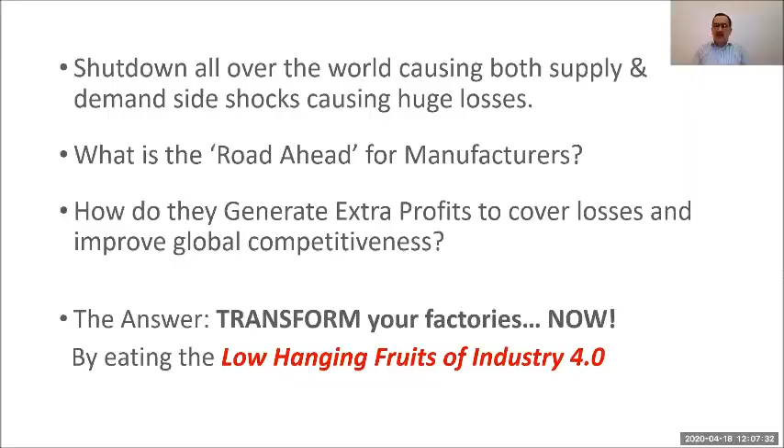So, before we move forward, I'd like to briefly recap what I told yesterday about the 3 low-hanging fruits.

First of all, Industry 4.0 is nothing but the fourth industrial revolution. The first took place 250 years ago in Britain with the invention of steam. The second took place around the beginning of the 20th century with the large-scale use of electric power and assembly lines. The third industrial revolution took place around 1970 when electronics merged with mechanical engineering, and you had PLC controlled machines, then NC, and finally CNC. So whatever we are seeing today in most factories of the world, 99% of the factories, is some variant of Industry 3, which means more and more sophisticated versions of Industry 3.

Now, the difference between Industry 3 and Industry 4 is that in Industry 4 you have everything connected. So all your machines - let me give a simple example. You can have a factory with 100 CNC machines, latest Mori Seiki or Mazak or some 5-axis machining centers, and that factory is still working under Industry 3 standards. Whereas you could have a factory where you have one hacksaw machine or a metal cutting machine which has a black box fitted in it, transmitting its data in real time. That is Industry 4. So Industry 3 or 4 has nothing to do with the type of machines. It is to do with the fact whether all your machines are connected, they are transmitting data, they are receiving instructions, they are being monitored in real time.

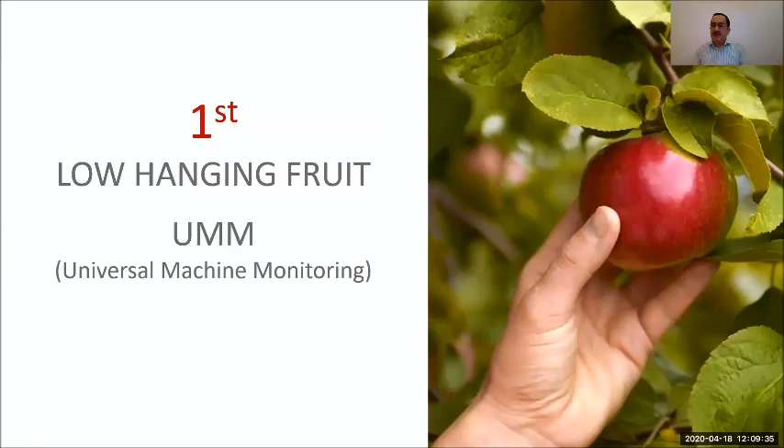That is Industry 4. So the first low-hanging fruit of Industry 4 is this universal monitoring system, wherein any machine of any make can be connected with a black box which will lift the data about its running, about its downtime, about how it operated in a shift, in a day, every hour. And through cloud, it will convey the reports as well as alerts to concerned people. So this is the first low hanging fruit.

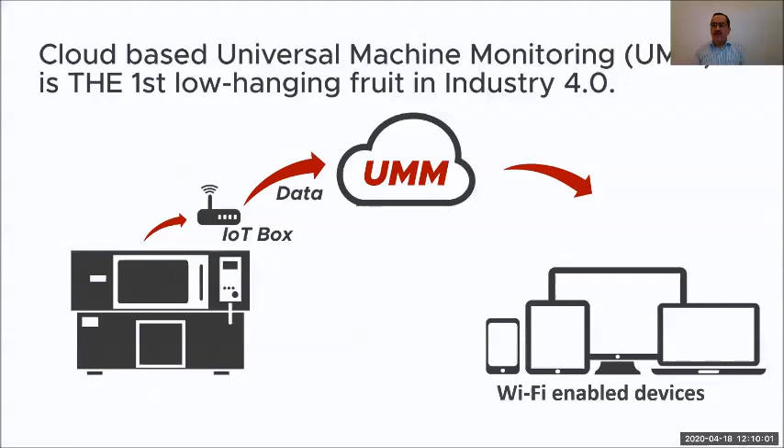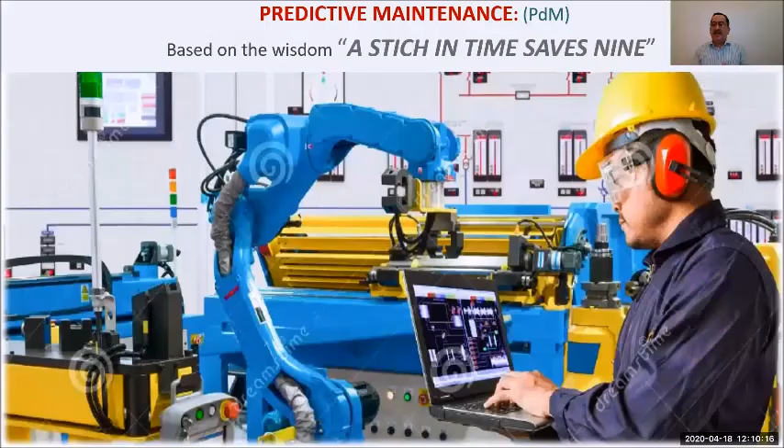Second is called predictive maintenance, where instead of waiting for a machine to go bad, instead of waiting for breakdown of a machine, or simply relying on preventive maintenance, we use technology which is basically sensors to detect the symptoms of potential diseases, future problems. So you detect those symptoms, whether it is increased vibration in the bearing, or excessive heating of the motor, or things like that, to sort of pinpoint that, okay, this means that the assembly is misaligned, or bearing preload is not correct, or something else.

And this is all done by the system. The system has the intelligence to be able to read the symptoms and give instructions to concerned people to go and take the necessary action.

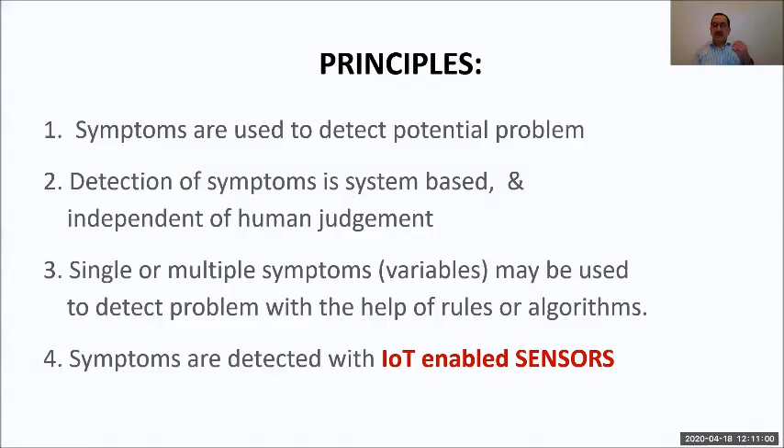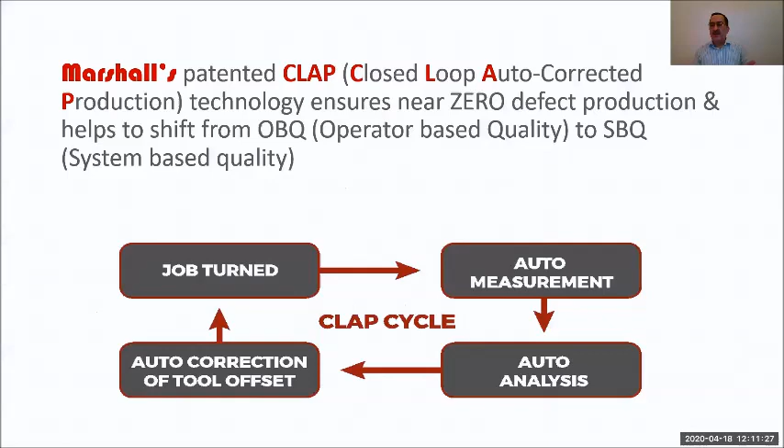So third low hanging fruit is called closed loop auto corrected production, or CLAP. This is a method by which whatever job is made on the machine is automatically measured, auto analyzed, and auto corrected. The CNC is auto corrected so that you have zero defect, or near zero defect, production without relying on your skilled operator or inspectors. So these are the three low hanging fruits of Industry 4.0.

Now we will come specifically to how you will use these tools to double your profits. I believe there is a wonderful formula which perfectly describes what you need to do to double your profits. And this formula is called C is equal to QP square.

Friends, in our student years, we all must have studied in physics the famous equation of Albert Einstein, one of the greatest scientists ever: E is equal to mc square, where E is energy, m is mass of the object, and c is the speed of light squared. This is the formula which has led to atomic energy being released, whether productively or destructively, whether for generation of power or for bombs. But this has been perhaps the most famous equation in the history of mankind.

Now obviously we are much more humble than that, but I can tell you, for the manufacturing sector, this equation C is equal to QP square is something you should keep in your heart. Remember it in your heart, because this is going to double your profits. This is going to increase your competitiveness by a huge amount and literally make you a global player.

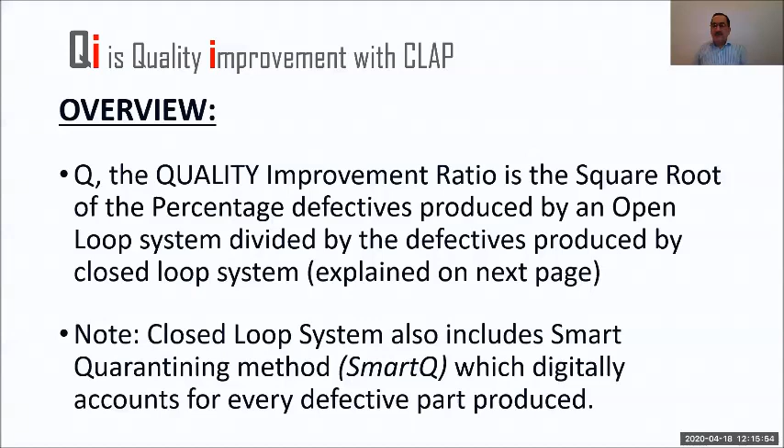Now, how does this quality improvement, QI, increase your profits? Very simple, self-evident, but I will still explain it.

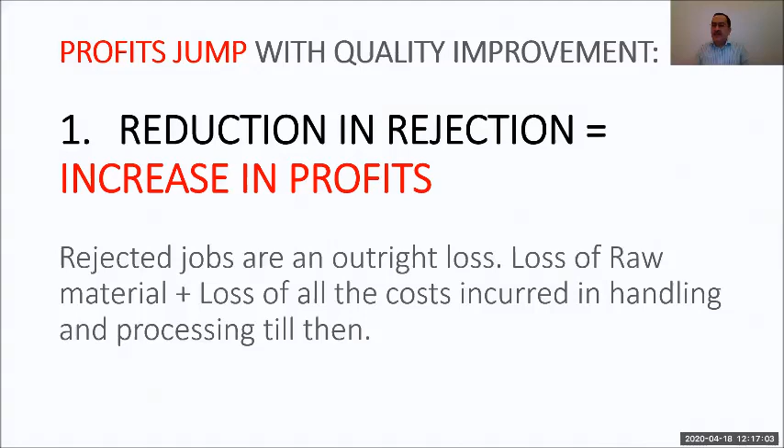First of all, reduction in rejection is a direct increase in profits, because any component which is rejected mostly gets rejected as it goes to higher, more accurate final operations where the accuracy or surface finish requirement is more. By that time, the raw material has undergone so many processes - forging, preliminary heat treatment, rough turning, finish turning, and so many other processes. So if it gets rejected at the gear cutting stage, all the previous operations have been done, and it's a huge loss of raw material as well as the effort of all those machines.

Second, when you have closed loop auto-corrected production plus a smart quarantining system called SmartQ - these are things I'm going to explain in the next webinar, which will put together all these technologies, and I will reveal some new technologies we have recently launched along with some of our overseas partners. There I will reveal what smart quarantining is and how we do it.

But for the moment, I'm explaining that if you have this closed loop production and smart quarantining system, you almost eliminate all your inspectors, and you can also reduce the cost of your operators. Instead of skilled operators who are expensive, scarce, and have a lot of problems associated with them, you can have relatively less skilled people, because you don't need a person measuring a job, knowing the drawing of the job, or inputting the correction in the wear offsets of the CNC machine. So you reduce the cost of your operators and you almost eliminate inspectors.

I'm saying almost because some inspectors may be needed to take care of things the auto gauging cannot do, maybe some visual inspection or something else, but the number gets reduced. So all this saving, if you multiply the number of people saved over 3 shifts, you get a huge saving which directly goes into your profits.

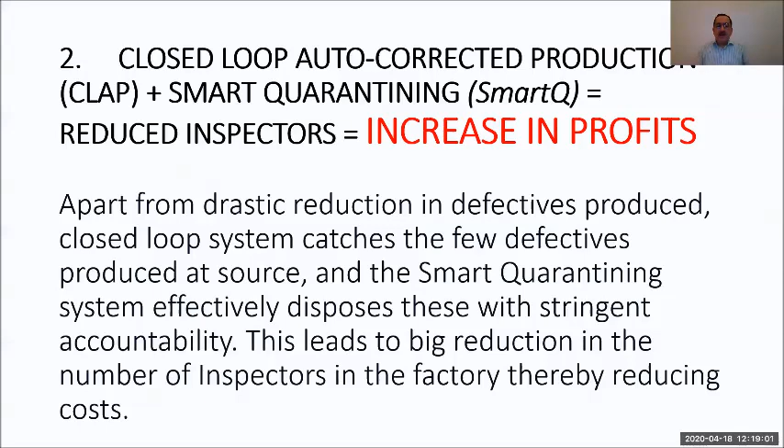Now, how is this quality improvement done? This is done through two types of smart correct gauging stations, called Smart Correct Eco and normal Smart Correct, for different kinds of applications. Earlier we used to have only Smart Correct, and then, keeping in mind that a huge number of people need auto gauging, we came up with the economical version which can use your existing inspection systems - you plug it into this device and auto correct your machines. The bonus with these is that you have digital records of all your measurements, which is also good for sharing with your customers.

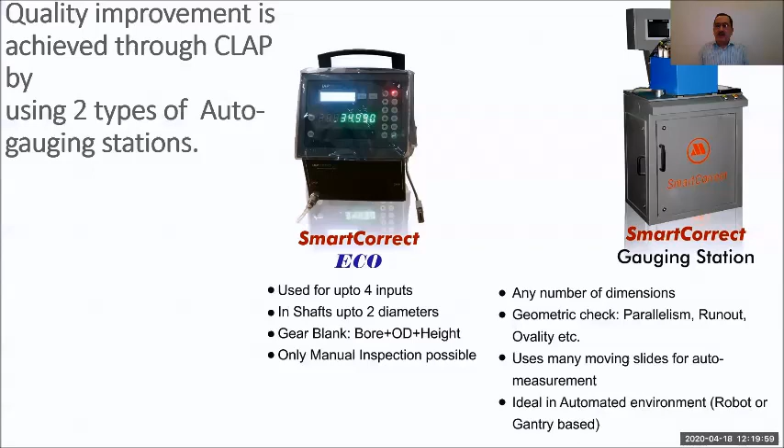Now, to just summarize this quality improvement, QI, I'm referring again to this CLAP cycle - how QI is increased. When you machine a job, it is automatically measured, auto-analyzed, and auto-corrected. This results in something which is very, very magical.

How many of you would be aware of these terms CP and CPK? CP is called process capability, and CPK is basically measuring how well centered your process is. Because time is very short, I cannot show you those slides with the bell curve and tolerance limits, but later in our discussions we can go over this in detail one-to-one. Please understand that this is a very, very magical formula: CPK greater than 0.9 into CP. If you are able to achieve it - and you do achieve it with the help of these gauging stations - it means you will have zero defect quality without any skilled operators and without inspectors.

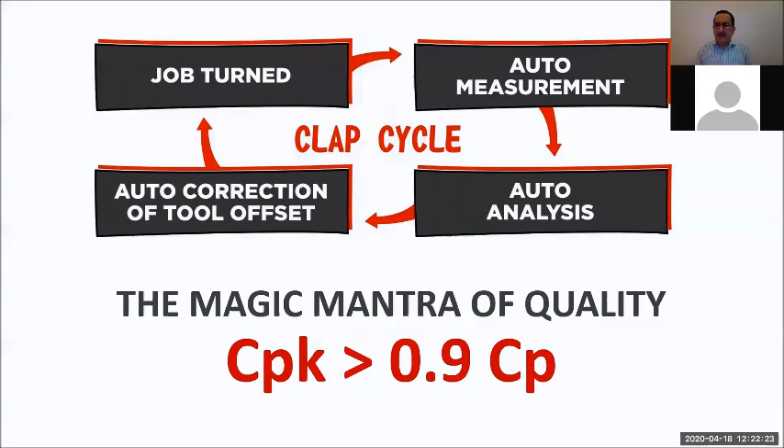Second, now we come to productivity. If you remember the magic formula, C is equal to Q times P squared. There were two P's, that's why P squared. One P, and by P I mean productivity increase - one P is called PO, and the second P is called PE. PO is the productivity increase by process optimization, and PE is the productivity increase by increase in OEE. This is something you need to understand very, very deeply.

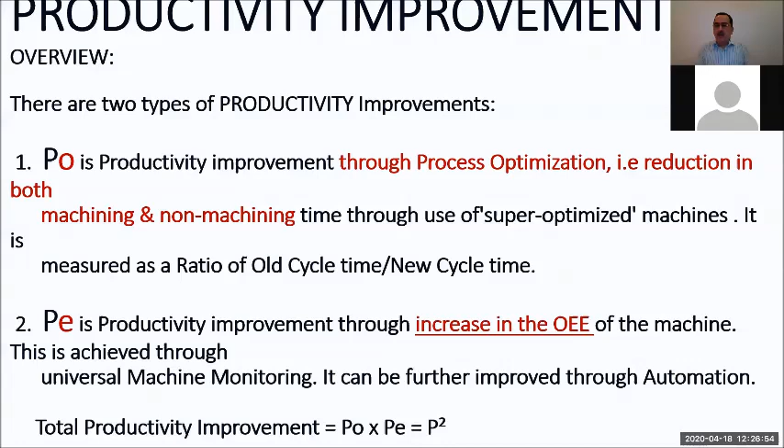So as I mentioned earlier, there is a compounding effect, P square, because PO multiplied by PE. I'll give you an example. Suppose you increase your process optimization by 10%, okay, and you increase your PE by 14%. When you multiply this, the net effect is 25% increase in productivity.

So if you were producing 400 parts per day, you are now producing 500 parts with the same people, with the same equipment, in the same factory, with the same space. So when you go from 400 to 500, that's a 25% increase. It has a dramatic effect on your profits.

I have some calculations which I can share with you, spreadsheets where I have simulated all this. I have found that depending on job to job and what kind of hourly rate or what kind of piece rate you are getting for that job, I can demonstrate through those calculations that a 25% increase in productivity increases your profit per component by 50 to 80%.

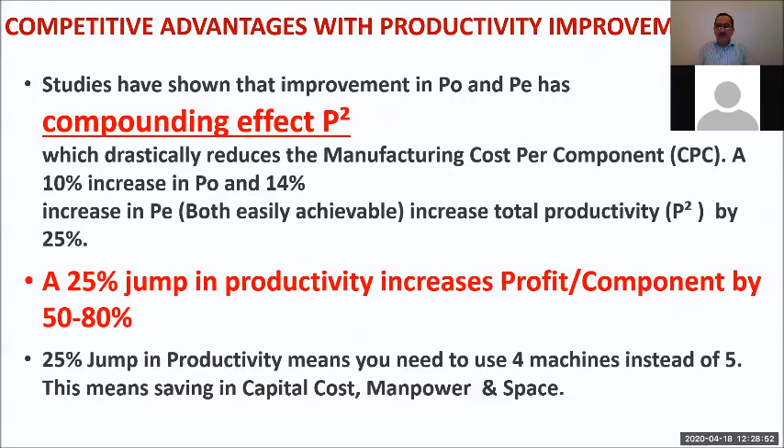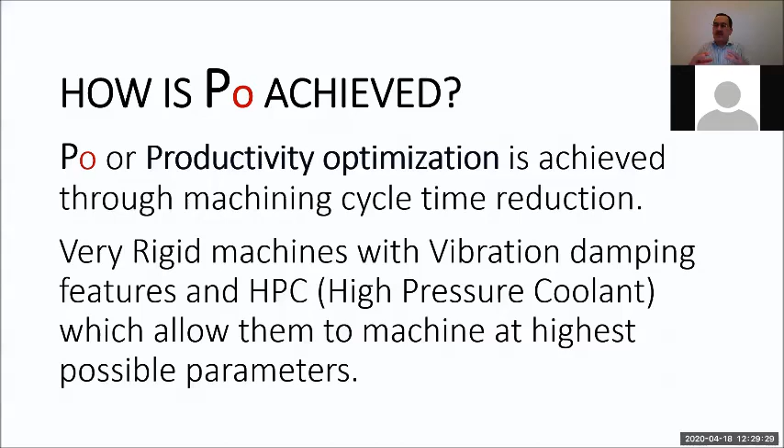So how is PO achieved? PO, as I mentioned, is process optimization. This is achieved through machining time reduction, cycle time reduction, both machining time and non-machining time, through more rigid machines with special features like vibration damping and high pressure coolant, which allow them to machine at higher parameters with lower tool cost. Now this is the key: you reduce the cycle time and also reduce the cost of the tools. These are the two biggest things which affect the cost of manufacturing of a component. So if both things go down, your profits go up. And I'll show you a small clip to explain this.

Before I show you that, there are two technologies in turning, CNC turning. One is high pressure coolant and the other is monoblock structure with vibration damping. These are very, very powerful technologies. High pressure coolant is a boon.

It not only smashes your chips and leads to better evacuation, but also reaches the tip of the tool where the cutting is taking place. In normal machines with normal pressure, the coolant is not able to penetrate to the zone where the cutting is taking place. With high pressure coolant, with pressure between 20 to 70 bar, the coolant is able to reach the point where the metal is being cut, and it cools the tip over there. It allows you to operate at higher speeds and yet gives you higher insert life.

Second thing is monoblock structure with vibration damping. If you have to use the latest tools to their full potential, you need machines which are vibration resistant, so that they can be operated at higher speeds with higher rapid movement of the slides. For that, you need monoblock structures. The most prevalent technology right now is to have separate structures - bed separate, base separate - you bolt everything together. This does not allow for super optimized performance. It does not allow you to operate at the very best speeds.

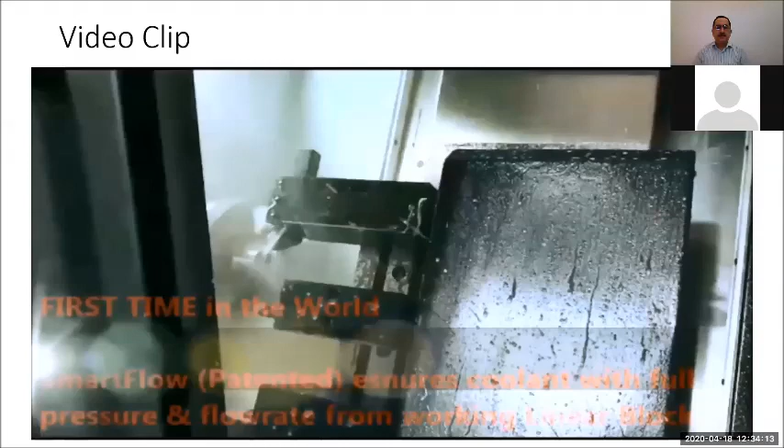So this is how you increase PO, process optimization. Now the second P which affects your profits is productivity jump through OEE increase. Now how do you increase the OEE?

You increase it through universal machine monitoring. And let me tell you, currently, if you see factories across the country, the OEE is quite poor. I have visited hundreds of factories. In fact, I visit hundreds of factories every year. And let me tell you, both PO and PE and QI are quite poor.

If these are improved to their true potential, you will not have doubling, you will have maybe 3 or 4 times the profits. I tell people, factory owners, plant heads, production managers - if you are having a net profit of X%, let's say for discussion 5% net profit, then the easily avoidable loss is 2 times that. 10% is what is going down the drain every day because of poor QI, poor PO and poor PE. All these are terrible and they need to be improved drastically.

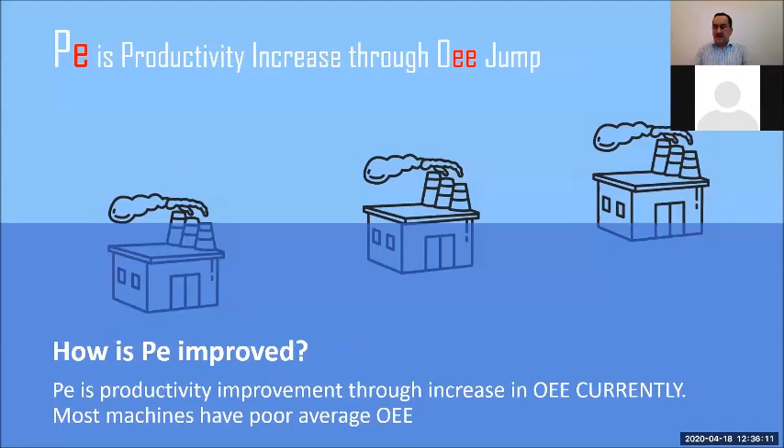Now, why do you need to have a UMM system? We discussed UMM yesterday. I briefly reintroduced UMM today - Universal Machine Monitoring, without human intervention. Why do you need it? You need it because every machine shop has these typical problems. Frequently, machines are stopping for various reasons, and you don't know why the machine has stopped.

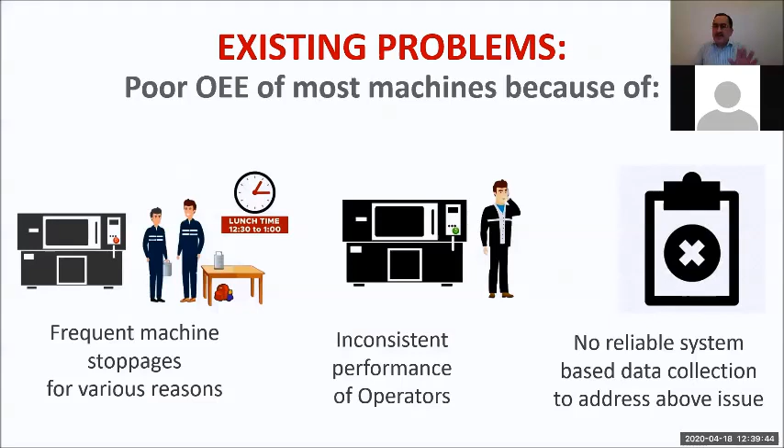Second thing is that if the data does not reach you in a very well presented, tabulated manner in real time - if I'm sitting at my table and want to know what's going on, if I cannot access the data immediately, and cannot get it in the form I want - hourly, shift wise, day to day, machine to machine comparison - then I cannot make the improvements. So these are the real problems of machine shops.

What is the solution? UMM - universal machine monitoring, which can be done on any machine of any make - CNC, non-CNC, power press, die casting machine, anything.

So why is it universal? Because it fits on any machine, and it is characterized by a word. There is a word which describes the properties of a perfect universal monitoring technology - at least it applies to our technology. That word is Trump, the name of the US president.

It's something you can't forget. So Trump stands for: T is tamper proof, R stands for reliable, U stands for universal, M stands for maintenance free, and P stands for plug and play. These are the core properties or qualities of a good UMM system.

The UMM picks the data from the machine and takes it to the cloud, where we have a secure server with software and storage, and this is on Microsoft. There, the data is crunched and analyzed through various formulas, and it comes to you in a very nice manner in different types of reports.

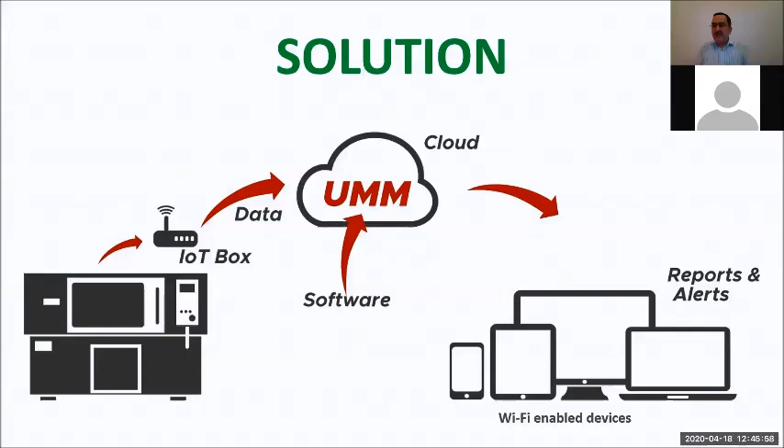This is typically the dashboard of Machine Metrics, where all kinds of reports can be generated. Because of lack of time I cannot go into length on this, but there are many types of information you get in different forms, which help you really improve the performance of your machine shop - not just OEE, but also tool cost reduction, power saving, so many things.

For example, you can get data that your machine is powered on but it is not running - it is wasting a lot of power because your hydraulic system is on, your AC is on, other things are on, but the machine was switched on and the operator went away. So there are many ways in which this information, which you get through the UMM, helps you operate your machine shop in the best possible, optimum manner.

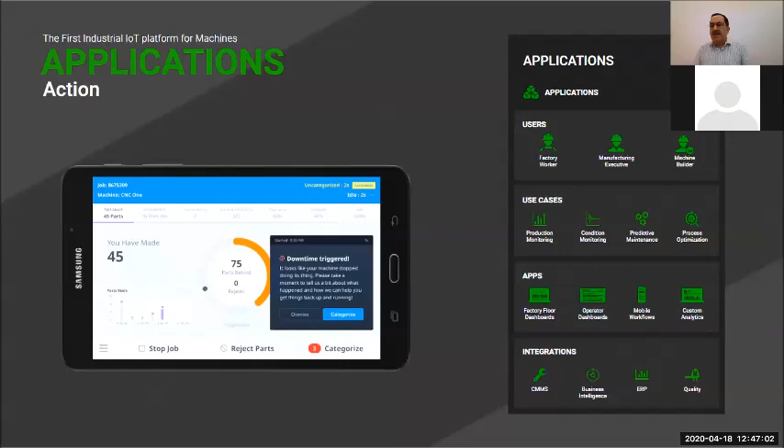This is a study done in India by us, where after installing the UMM, observing over a period of time, and then starting to take action, we had an 18% increase in OEE. Data accuracy reached 99%, and the return on investment for the cost of the UMM was just 3 months - in 3 months its cost was recovered.

And there was a 30% reduction in accidents and tool breakages in the night shift, because the customer came to know, and took our help, and we set up a system in which they could not increase the speed, plus they made some flexi hours for resting and things like that, which I cannot reveal because this is the customer's information. They used some methods of persuasion and compromise with which they ensured that tool breakages in the night shift did not take place - a 30% saving. And tool cost saving is pure profit, it straight away goes to your bottom line.

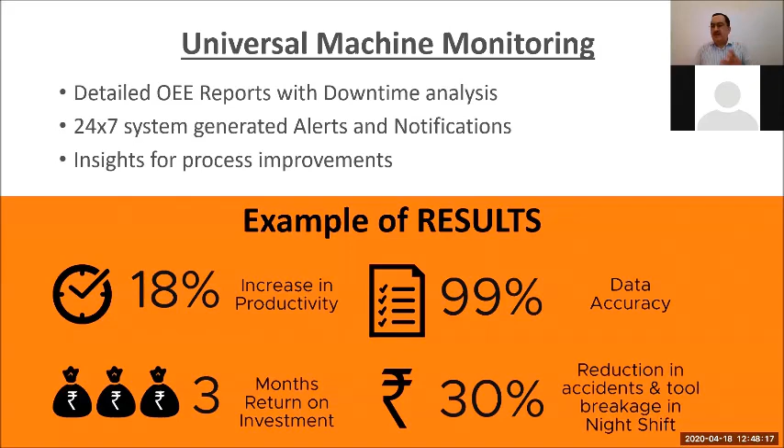So here is data shared by Machine Metrics USA for a customer of theirs called AccuRounds. They have a 20% increase in OEE, 15% cumulative reduction in tooling, and even a 52% reduction in turnover of employees.

This is also important to understand: when you have an unmonitored system, a system which is not scientifically monitored, what happens is that you tend to blame everybody. If in the night shift something wrong is happening, you will say - and I'm sorry for using an unparliamentary word, but just to make my point - you will say everyone is dishonest, everyone sleeps. Now if there are some honest people who are not doing those things, they feel demotivated because the anger of the management is spread in all directions, since there is no particular person or machine you can pinpoint as the cause of the problem.

Because of that, there is a lot of turnover of people. When you have a monitored system which is fair - because monitoring means you are fair - the bad people will go, good people will stay, and you can replace the bad people with better people. So ultimately your turnover of employees reduces, and you have a more stable workforce. In their case, as you can see here, 60 days was the return of investment for this technology.

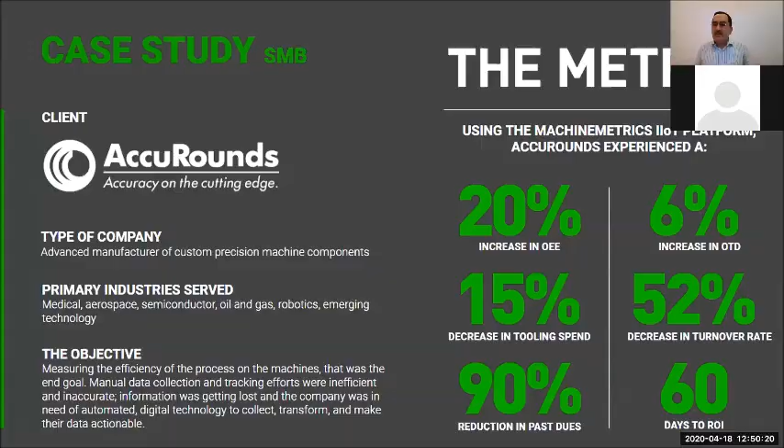Now, how do you implement these technologies in your machine shop so that you can double your profit? I will give you a brief roadmap today, and then we'll have a question answer session. In the final session, which will be slightly longer because we will be focusing on automation, we'll be giving you specific technologies like IoTQ, Internet of Things for Quality. We will give you the whole framework - what you can do to make your machine shop, your factory, world class, so that you wipe out your losses because of COVID and become super competitive, whether in the domestic market or in the export market.

Let me tell you one thing - I'm just interrupting this normal presentation to share something. Marshall is the first Indian machine builder to set up a company in the US, called Marshall Automation America, and set up a tech center in Atlanta. Atlanta happens to be in the heart of the Southeast US, which is the new center for all manufacturing. All the new manufacturing of automotives, aerospace, and other such things is centered in those 7 states of the Southeast, and Atlanta is in the heart. We've been there now for more than a year - our tech center opened in February last year. So we are part of that local manufacturing ecosystem, and it helps us gain a lot of knowledge about what is going on in such an advanced country.

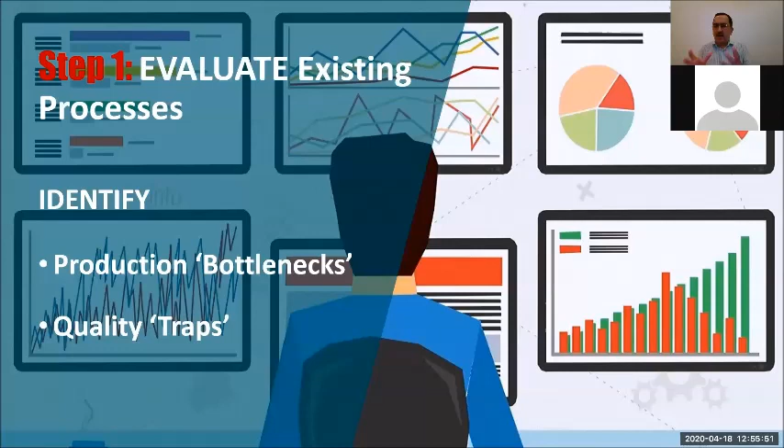So you identify them, and then you initiate pilot projects. A pilot project should have 3 components.

You should have quality improvement through CLAP. You should have productivity improvement through process optimization. And you must have productivity improvement through OEE increase. All three things - the pilot must comprise improvement in quality, improvement in process optimization (PO), and improvement in OEE, maybe on different machines.

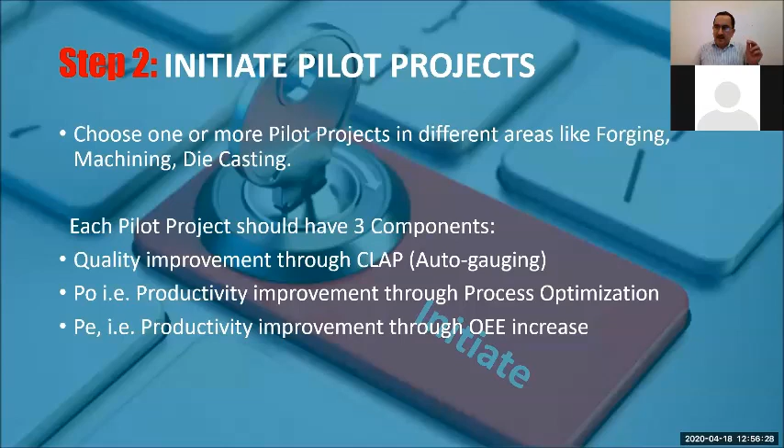Now, when you implement these solutions, you have to scientifically monitor the effectiveness of these solutions. So when you talk about quality, what is the percentage fall in defectives? You have to record very meticulously. When you record the effectiveness of PO, what percentage has your cycle time declined? When you monitor PE, what is your average OEE increase? These have to be very scientifically monitored.

So let me give an example, if you are talking about UMM, you have installed a UMM to increase the PE of a particular machine. Now, the poor OEE of the machine was because of various reasons. It could be because of the availability, A. It could be because of the performance, P.